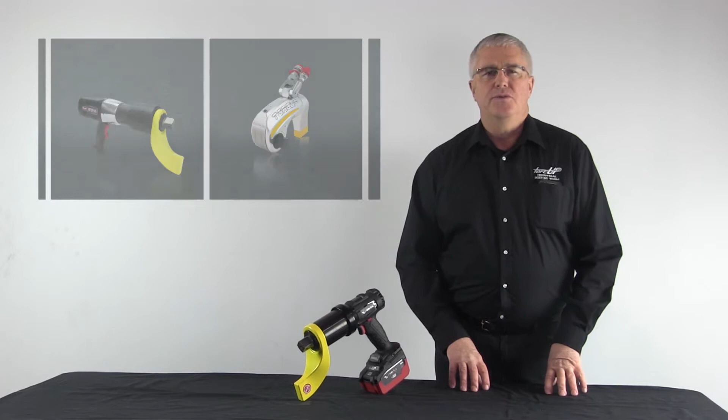When you're looking to buy a torque wrench, what does it mean when a manufacturer states that their tool is plus or minus some percentage accurate? It's important to understand exactly what is meant by this claim, because different companies use different standards and actual torque output can vary.

At TorcUP, we use set torque standards on all of our tools, which is also referred to as indicated value. Here's how set torque works.

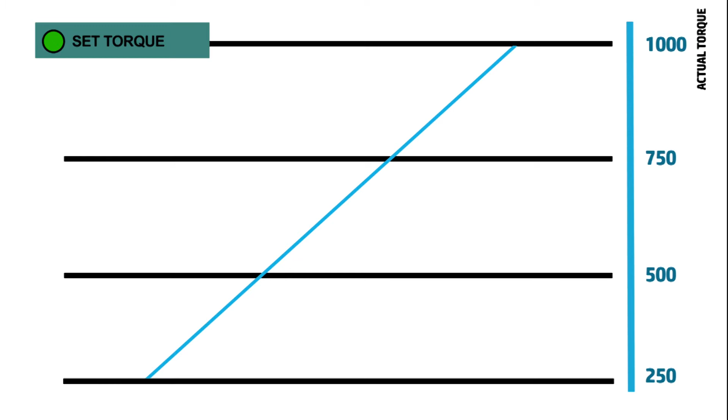Using our Volta VT1000 as an example, which has a torque range of 250 to 1,000 foot-pounds with a set torque accuracy of plus or minus 5%, when you set the torque to 500 foot-pounds, the acceptable range is between 475 and 525 foot-pounds, a plus or minus 5% accuracy of the indicated value.

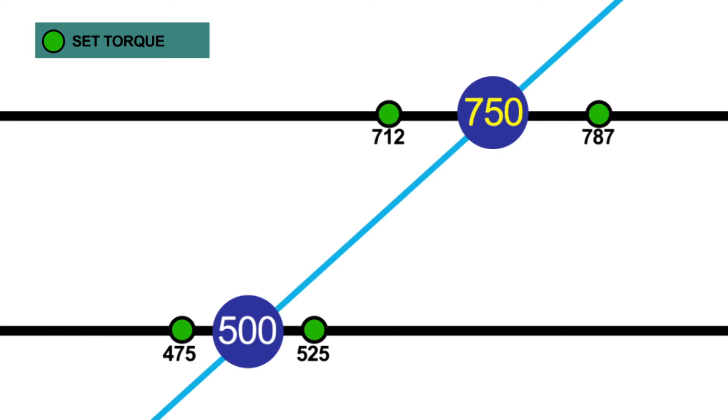When you change the set torque on the tool, the 5% plus or minus variance changes accordingly and remains at plus or minus 5% for every torque setting on the tool, from the low range all the way through the upper range. There is another standard used by some of our competitors called full scale.

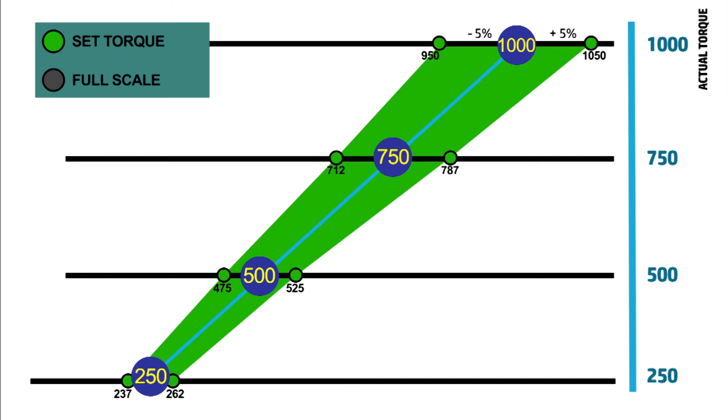Let's compare set torque versus full scale. Using the same tool with the same torque range and a plus or minus 5% accuracy statement, full scale acceptable variance at the top end of the tool's torque capabilities would be the same for both standards.

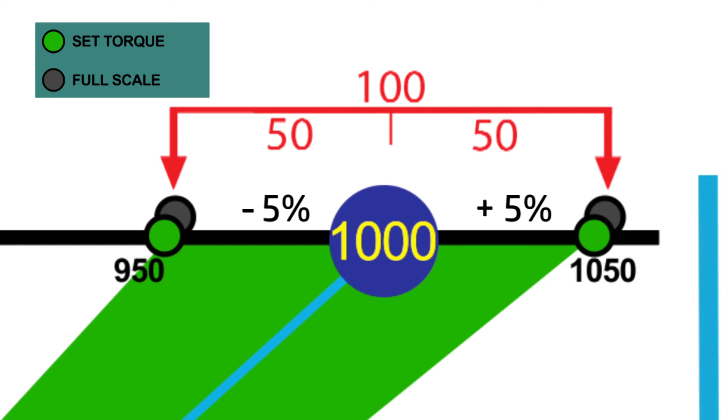The difference in these standards is evident when you lower the torque setting. While set torque adjusts the acceptable variance, full scale takes the highest torque setting variance and uses this number as the acceptable range all the way through the lowest torque setting on the tool.

So when you look at the actual acceptable range at the low end, TorcUP will still be within plus or minus 5%, while full scale will actually be plus or minus 20%.

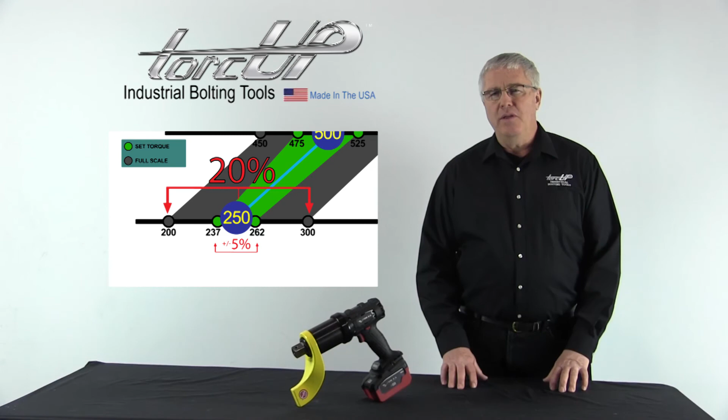So as you can see, there's a big difference in standards and a big difference in torque accuracy from company to company. Make sure you know what you're buying. TorcUP tools are not only made in the USA, they are the most repeatably accurate torque wrenches on the market.